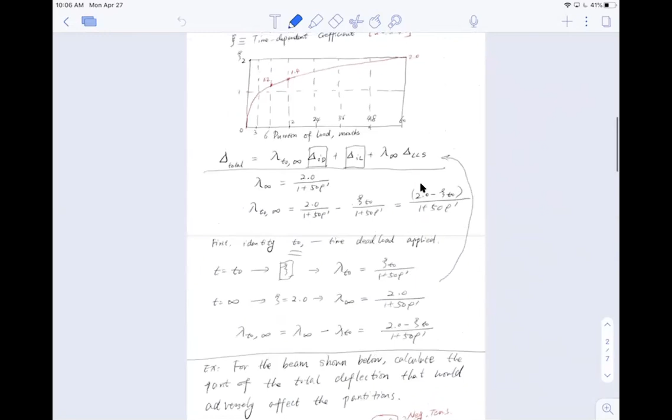Okay, so about serviceability, we have talked about the transformed sections, which means the cracked section and how to calculate the moment of inertia for that, and how we calculate moment of inertia for a beam in a continuous setting. Also we talked about how we calculate deflections, and we eased into an example showing this.

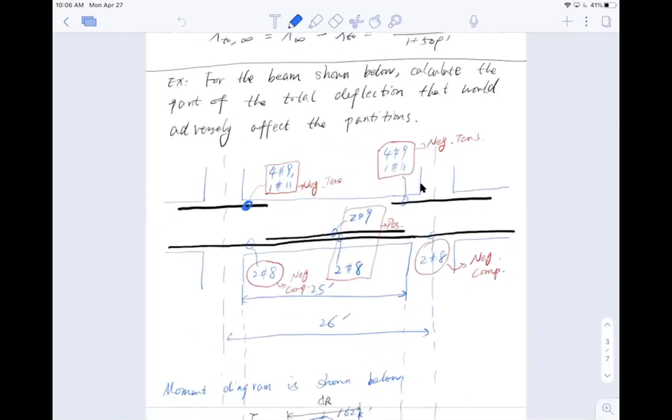This is the structure. I have reinforcement inside the beam, the column joints, and we calculate the applied moment diagram, and also the transform section. We divide them into the positive moment region, which is roughly here in the middle, and the negative region, roughly here, near the joint.

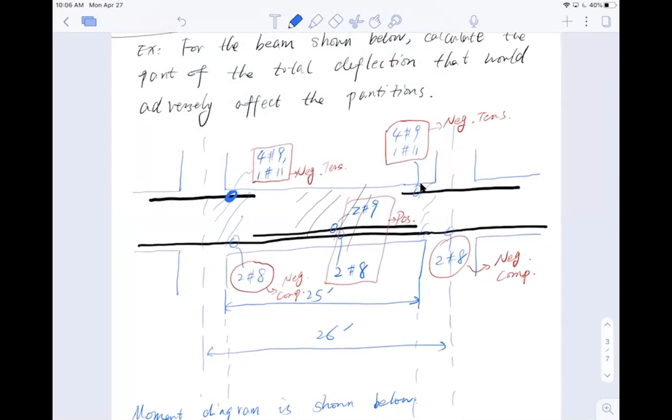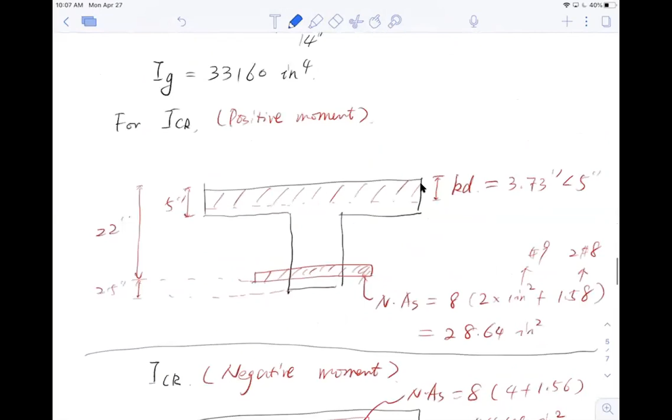The only reason we differentiate them is because they bend in different directions, so the compressive zone is on a different side. For positive moment, the compressive region is on top within the flange, and we have the converted transformed area from reinforcement at the bottom. For negative moment, the compressive region is at the bottom, and the tensile is on the flange. This is how we differentiate the positive and negative moment regions.

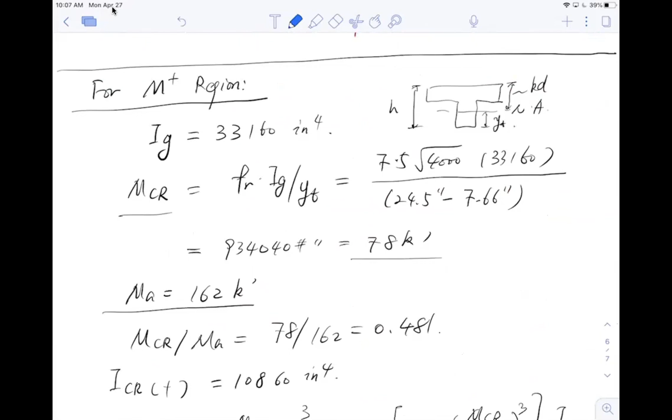You can see how we calculate the transformed section, IG, and how we calculate the effective moment in terms of the cracking moment, applied moment, and also IG, the gross moment of inertia, and the cracked moment of inertia. This is for the positive region.

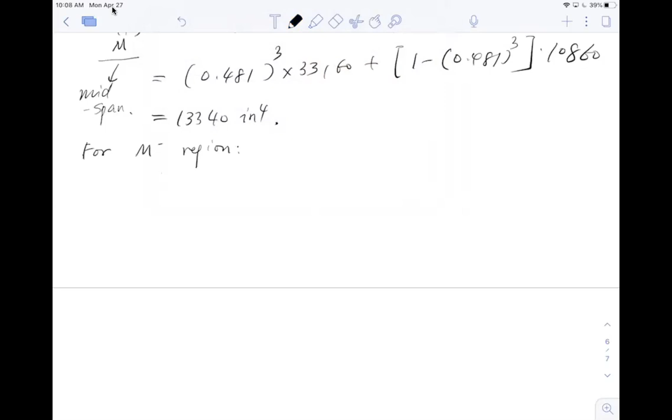So we're going to continue now for the negative region. Let me use a different color. For the negative moment region, which is the end, IG is 17200 inch to the 4th. One thing I want to point out: this number is different from the one previously calculated.

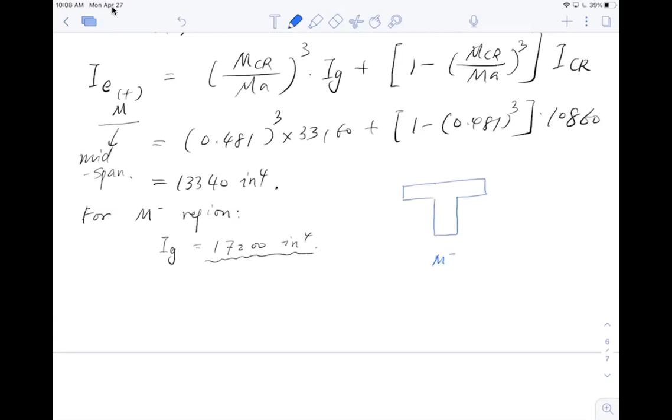What is different? For the negative region, my T-beam is going to have a shape like this. When I do positive, I use the flange, but when I do negative, I'm only using this right here.

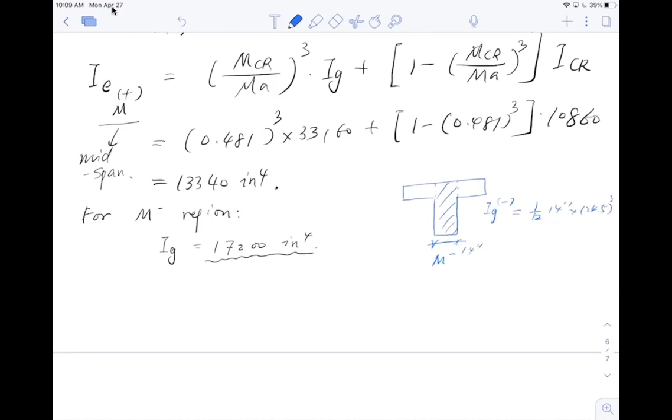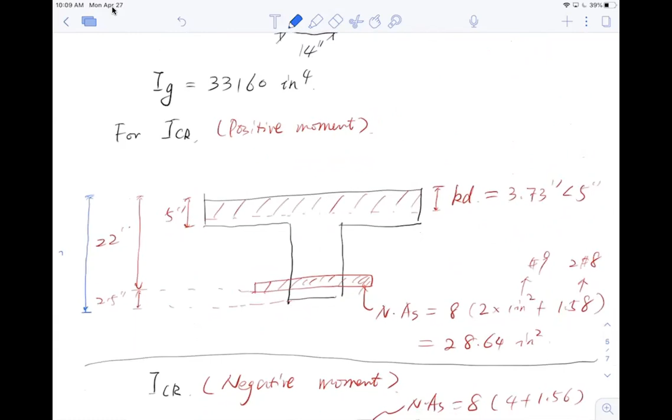So when I calculate IG for the negative region, I use 1 over 12 times 14 inches times 24.5 to the power of 3. What is 24.5 in our problem? That's the total height of the beam right here.

So now you see, if we calculate the gross moment of inertia, it's a little bit different already. The cracking moment, correspondingly, MCR, is going to be FR times IG over YT, with a negative sign to differentiate it. This is 7.5 times the square root of 4,000 psi concrete strength, times 17200 inch to the 4th, and the bottom here is 12.25 inch, which is essentially half of H, since 24.5 divided by 2 is 12.25.

So now I have my cracking moment, which converted back, first in pound-inches, is 666014 pound-inches, which is 55.5 kip-feet.

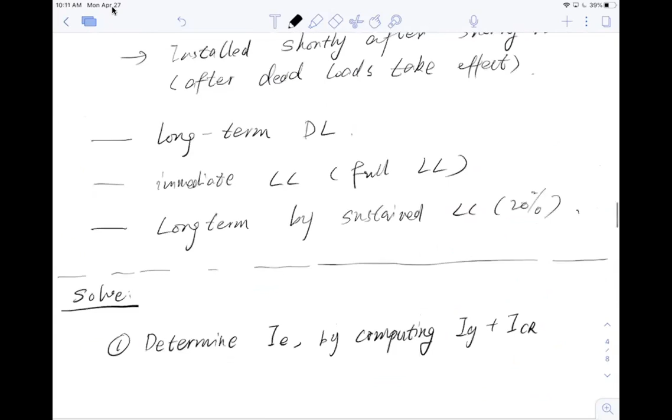Now the applying moment, using a negative sign on top — if you want to find the applying moment, you go back to the moment diagram given here, and this is the negative moment, the applied negative moment, which gives me a number of 225 kip feet.

So naturally, MCR divided by MA, negative sign, that's 55.5 divided by 225, equal to 0.247.

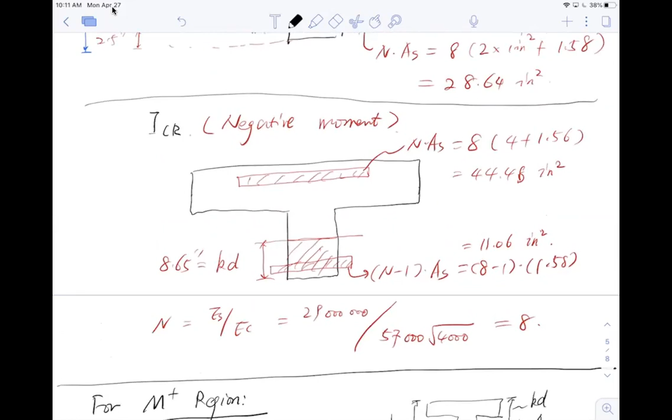So how about the cracking moment of inertia? We already calculated that from this diagram, so I'll skip the details — if you have the diagram, you can proceed to calculate it. That gives you 11366 inch to the power of 4. If you have a question how we got that number, please practice a bit following our instructions from last lecture, and if you couldn't get this number, we'll compare it tomorrow on Tuesday office hours.

So I'll illustrate that Tuesday office hours, okay? And then with that, I get my IE1, equal to 0.247 cubed. This is 17200, 1 minus 0.247 cubed, and 11366. And this gives the final number 11450 inch to the 4.

Now you wonder where that equation comes from, right? So this equation basically is MCR divided by MA to the cube, times IG, plus bracket inside 1 minus MCR over MA cubed, bracket here, times Icrack. Okay, so that's the formula.

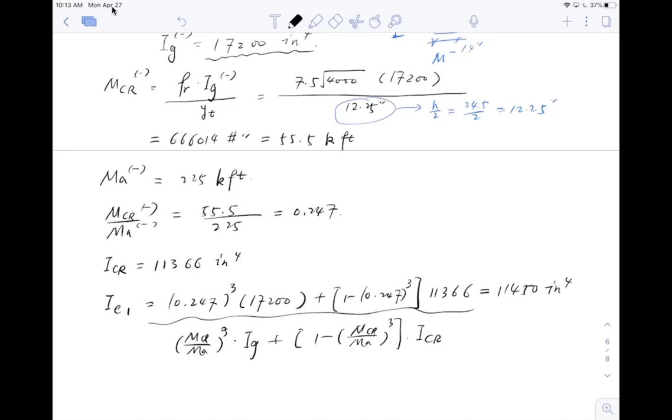All right, okay so you see here, I have one. Why is that? Because this is the column, and this is the beam. So this is IE1, and this is IE2, moment of inertia for both ends, and this is IEM, middle. This is IEM middle, okay? So we just finished IE1, but IE2, since it's symmetric, they're the same. And IEM is basically the

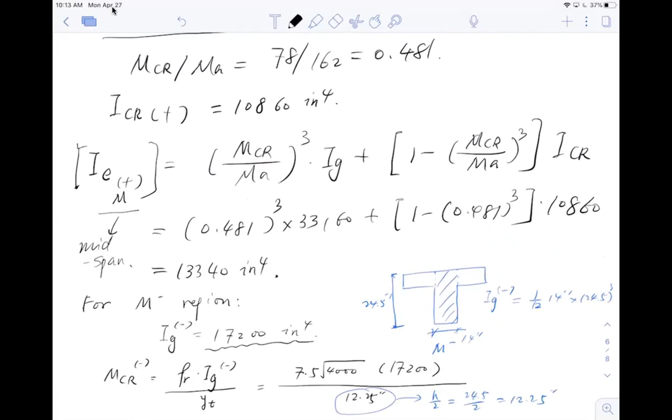positive moment, right? So this is the positive we just calculated before, last lecture, okay? So with that, I have my whole equation laid out for me. So the I effective equals half, 0.5, of IEM, which is the moment of inertia in the middle span, plus a quarter of IE1 plus IE2.

Okay, so now bring the number in, have 50%, 0.5, IE middle. What is IE middle? So go back to see this number, it's 13340, 13340 inch to the 4, plus a quarter of, now since IE1 equals IE2 in this case, symmetric, right? So this is 11450, which is this number here, multiplied by 2. Okay, so now I got the final number, 12395 inch to the power of 4.

Okay, so now that is the effective moment of inertia. That is the effective moment of inertia. Okay, so finally, I can start doing the deflection calculation.

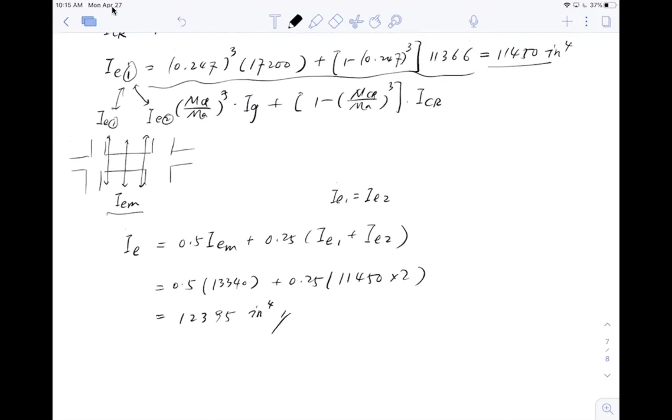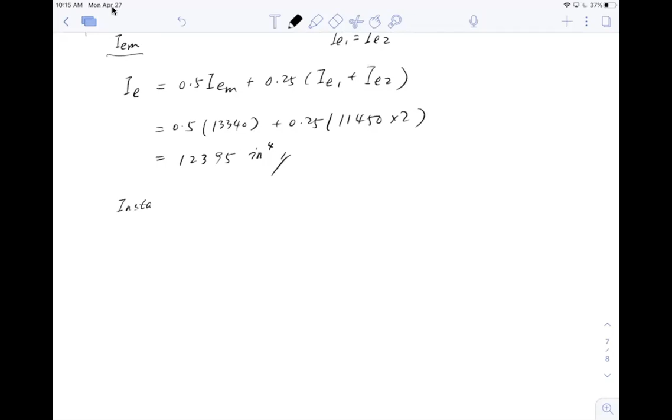So first thing first, I want to do instantaneous deflection. So what is my instantaneous deflection? That is delta I. So now I want to do delta I due to full dead load plus live load. So delta I, dead load plus live load, equals 5 over 48, L squared divided by EI.

Here, bracket inside, which is M moment, and this is middle span, mid span, plus 0.1, 10%, M1 plus M2, this is end span, left end, right end. So that is the equation used to calculate the deflection.

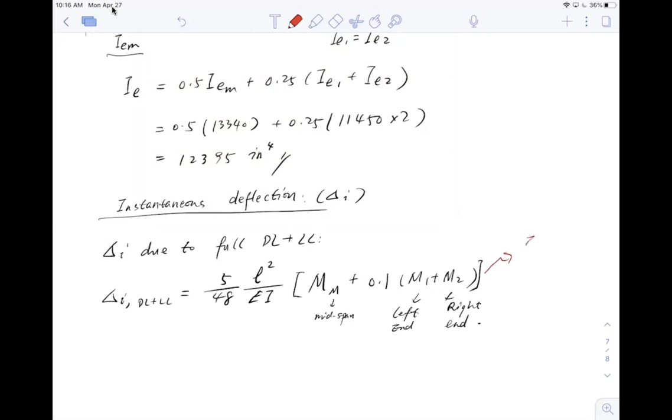Now you may wonder where that equation comes from, right? This equation you can find from equation 9-18 in the textbook. So that's the equation commonly used for calculating deflections.

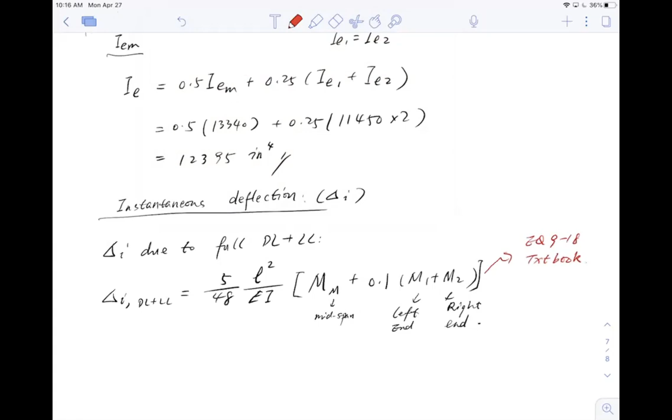All right, so now bring this number in. So I have 5 over 48. Span length is 25 feet, converted back into inches, 12 inch per foot, and square, don't forget square. And bottom here, the Young's modulus for concrete, that is 3,600 KSI.

And then EI, I got this number, this is IE, which is this number right here. So that is 12395 inch to the power 4. Okay, and then get this whole thing in, that is 162 kips feet. Where is that 162 coming from, right? You go back to the moment diagram,

Could you slow down just a little bit, please? Yeah, just a second, okay.

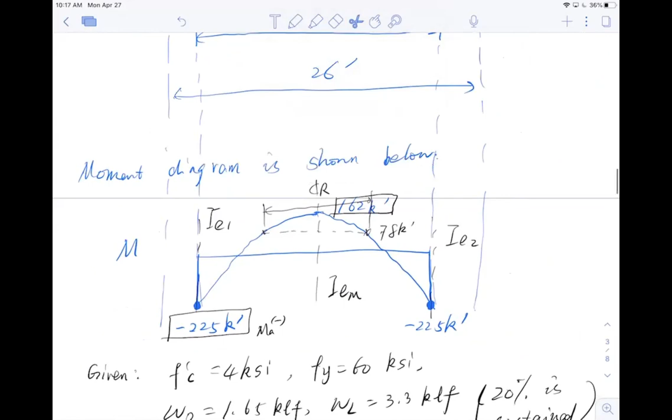So Sean, here's the moment diagram, 162 kips feet. So I'm gonna get this copied down here. Let me try to copy it. Okay, copy. All right, try to paste. Okay, so that's the moment diagram, right?

So Sean, what do you mean by slow down? You want to go back or? Oh, it's just going really fast. Okay, it's 8:15.

Okay, can you see these equations? All right, okay so let me quickly recall. So this equation for moment deflection, for calculating deflection here, this 5/48, this equation right here, this is an existing equation from the textbook, 9-18, okay? This is a standard equation. Now, we're not going to ask you to derive any equation for the exam. So if you, or homework, if you were asked to calculate deflection, you can directly use this equation.

And this is for a moment diagram like this, so it's a distributed load moment diagram. All right, so as long as I have a moment diagram like this, with end moment and middle span moment, you can directly plug in this equation to get deflection, okay? All right, so this is 0.1, and M1 is the end moment. The M1 is basically this number right here.

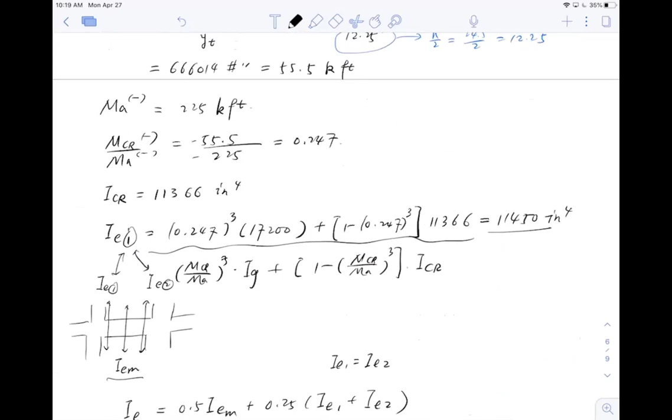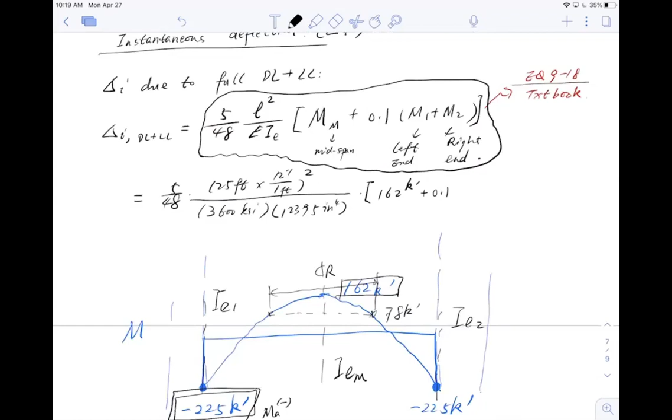The negative sign in front of it got canceled. So there's no signs in my ratio here. But if you go back to this equation right here, where I had to get moments plug into this deflection equation, there is sign, okay?

So this M1 is negative 225 kip feet, and I have another moment, which is another 225 kip feet. So make sure I have the sign considered. So this is minus 225 kip feet, okay? Don't forget, I have signs.

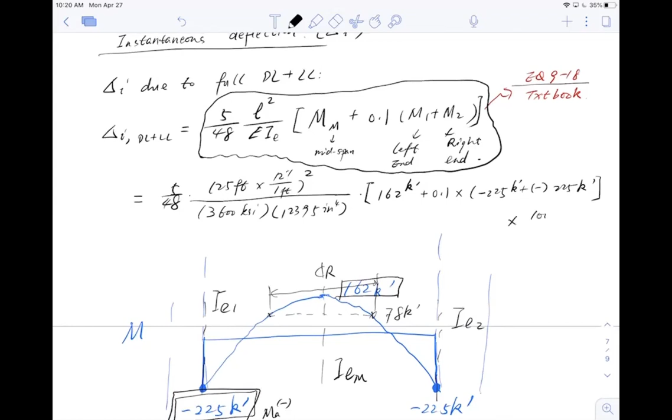Right, I have signs. Now this is in terms of kip feet. I want to convert it back to inch and pounds. So this is multiplied by 1,000, multiplied by 12.

And now I want to box this figure in. So this is not necessary, it just remind you, this is moment diagram.

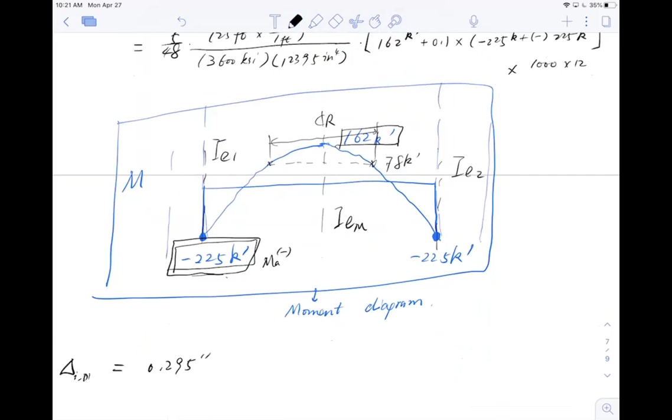So carrying on this calculation, simply just plug the number in. I got this number to be a 0.295 inch. And let me just carry this from previously. Okay, that's the deflection, instantaneous deflection. All right, this is instantaneous deflection.

Now this is dead load, DL, and live load, two components. So I'm gonna go back and see, actually the dead load, omega DL, is 1.65 kips linear foot. And the live load from previous lecture is 3.3 kips per linear foot.

So immediately I get a partition of the total deflection into the component caused by the dead load and the component caused by the live load. So now I have delta I, instantaneous deflection caused only by the dead load, equal to this delta I dead load plus LL live load, multiplied by a ratio. This ratio is omega DL divided by omega DL plus omega LL.

So this I actually have a 0.295 inch right here, and the top here 1.65, bottom here is 1.65 plus 3.3. So now I got the deflection for the dead load is 0.098 inch.

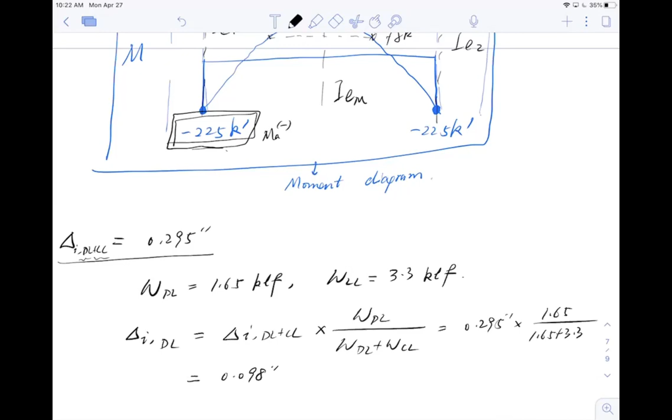Now then correspondingly the live load distribution, the deflection caused by the live load is delta I DL plus LL multiplied by omega LL divided by omega DL plus omega LL. So that is 0.295 inch multiplied by 3.3 on the top, and bottom here 1.65 plus 3.3. Okay, so I got this number to be a...

0.098 inches. Oh, not again, I'm copying it down simply. Sorry about that. So it's 0.197 inch.

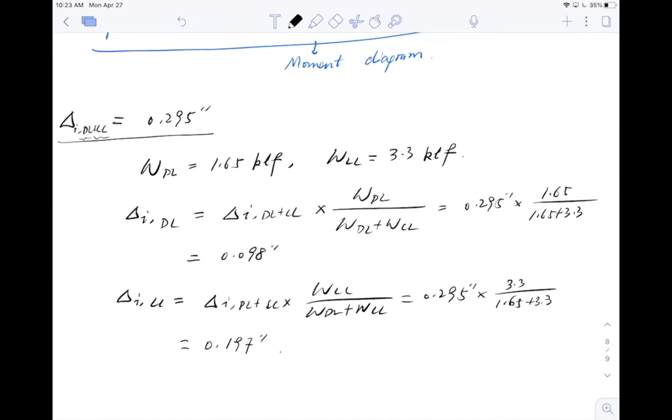Just short comments. After I get whole deflection out, I realize that my live load has much bigger deflection than dead load. So basically saying the deflection usually is controlled by the live load.

All right, good. Now let me ask you this question. If anyone cares to answer, the question is what or where exactly this deflection is at?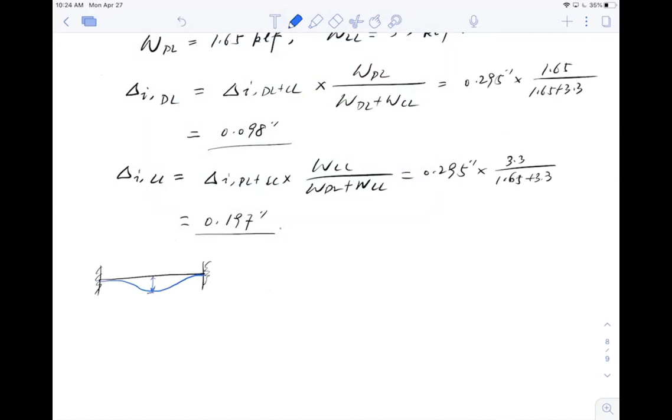So we talk about this is the beam. Say now we have almost like a fixed end. So it's gonna deflect, let me use something like that. So where is the deflection at? Right, so I want you to keep this in mind. This deflection is at middle span.

Don't forget, this deflection is at the middle span. Now you may ask, okay, so when we calculate the moment of inertia, it was not only in the middle span, we do consider the contribution from two ends. Yes, but those are boundary conditions. We do consider them when we calculate the moment inertia for the whole beam, but when we actually calculate the deflection, it is at the middle span.

Okay, all right, good. So this is instantaneous deflection. So how about long-term deflection?

So delta equal to long-term, equal to lambda delta I dead load plus delta I live load, and plus a lambda delta I live load sustained. This means sustained.

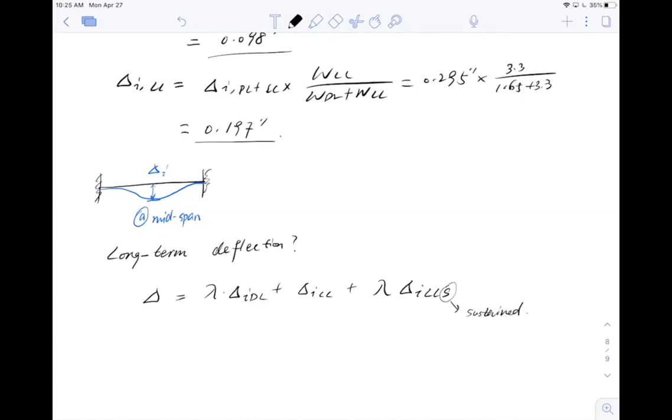Okay, and lambda is what? Lambda is a coefficient, and that is determined by xi divided by 1 plus 50 rho prime.

Okay, and now let's do some calculations. Now, first of all, this lambda here is regarding to a time, is a function of time. So when it is a function of time, basically I want to write a time here, t, and the only variable in this equation that depends on the time is this xi on the top. And we know that xi t, for life of structure, for the entire life of structure, xi t equal to what?

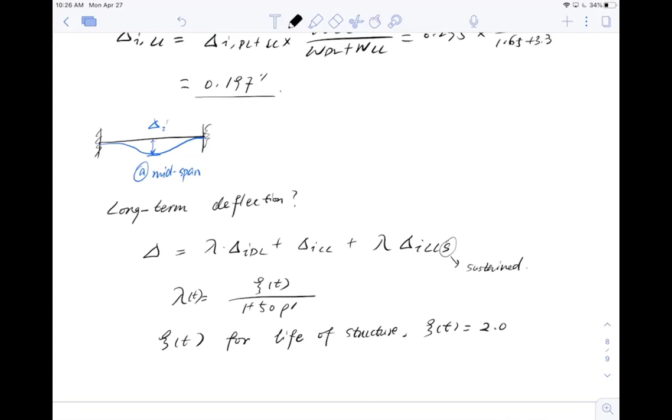Equal to 2.0, okay? Let me rewrite it better. Xi t equal to infinity forever, right? We assume our structure is gonna last forever, right? So this is equal to 2.0.

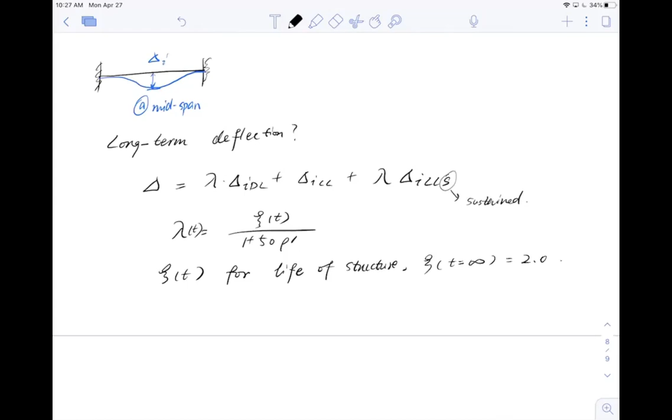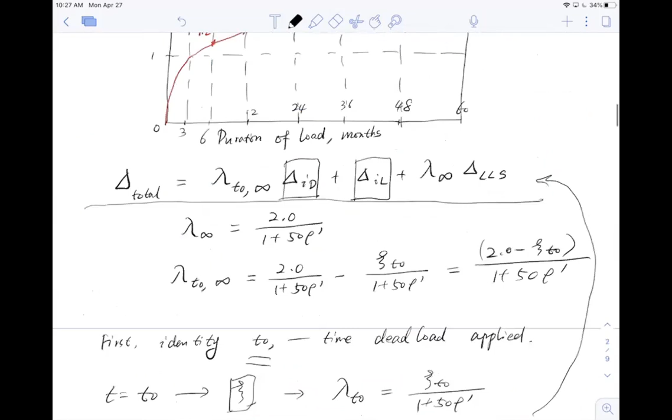Now if you're confused where that 2.0 is coming from, go back to our previous lecture notes. There was a drawing right here, and you'll notice that as my time approaches infinity, my coefficient yields at 2.0, okay? This is this equation right here.

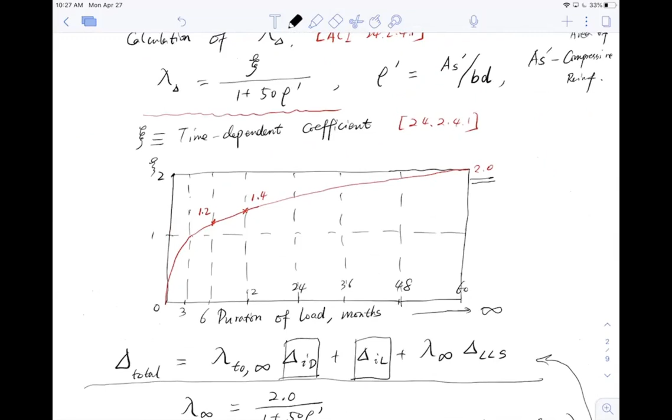Now in the exam, you don't have to remember the equation, but please prepare this figure, okay? Prepare this figure, include this in your crib sheet.

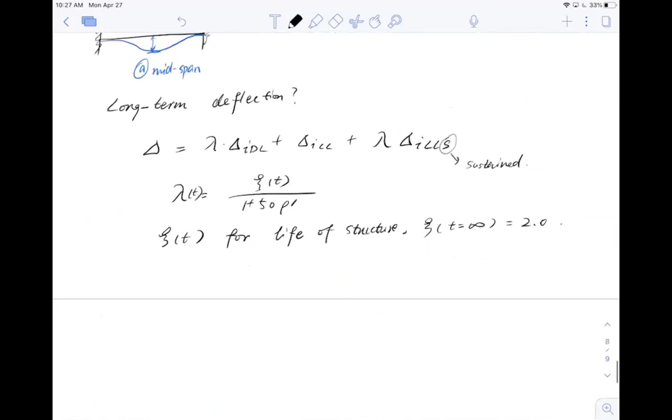All right, so now with that, I have the equation laid out and my xi on the top written as 2.0. Now the problem is, what is rho prime? Rho prime is the reinforcement ratio for the compressive reinforcement, that is AS prime divided by BD. Now AS prime equal to the area of compressive reinforcement.

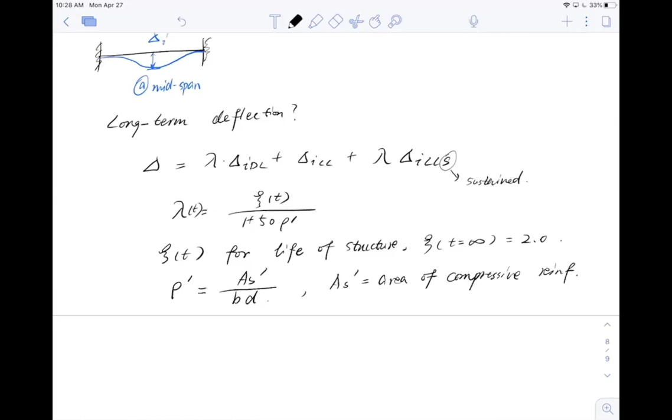Okay, so what is AS prime? Don't forget, let's scroll back to the structure drawing we have here. At middle span right here, I don't have any compressive reinforcement. AS prime equal to 0.

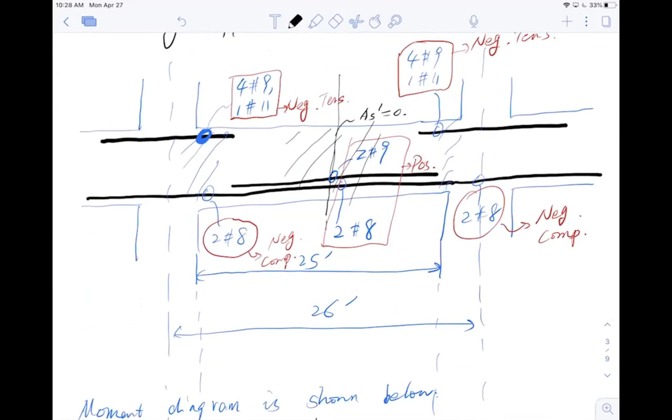So what we're gonna do here is, consider this: since at middle span there's no compressive reinforcement, therefore AS prime equal to 0. So rho prime equal to 0.

Now with all these parameters, I can now say lambda equal to 2.0 over 1 plus 50 multiplied by 0, and this gives me 2.0.

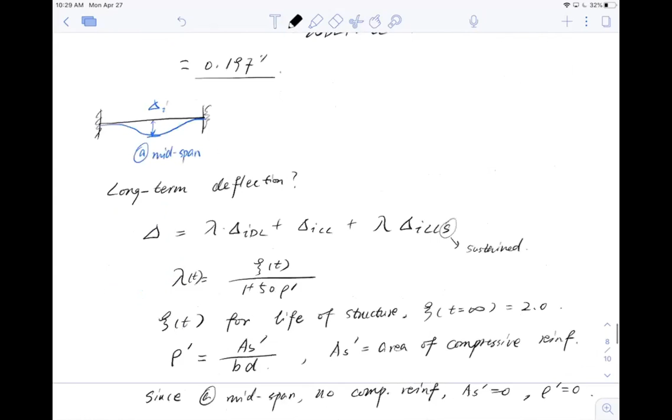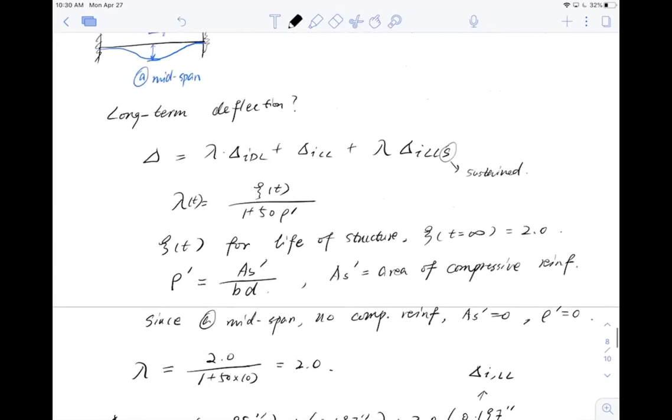So with this factor, lambda equal to 2.0 determined, I can plug back into the equation to find my long-term deflection for the partitions. That is 2.0, bracket inside: the deflection caused by the dead load is 0.098 inches, plus live load which is 0.197 inches deflection calculated previously, plus another lambda multiplied by 0.197 inches, which is the delta instantaneous live load. But the equation right here is asking for sustained.

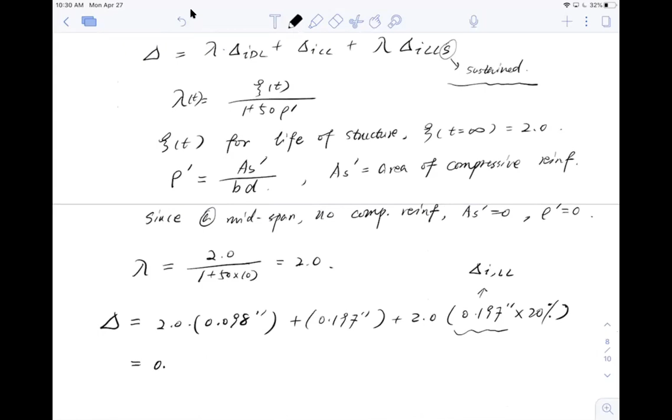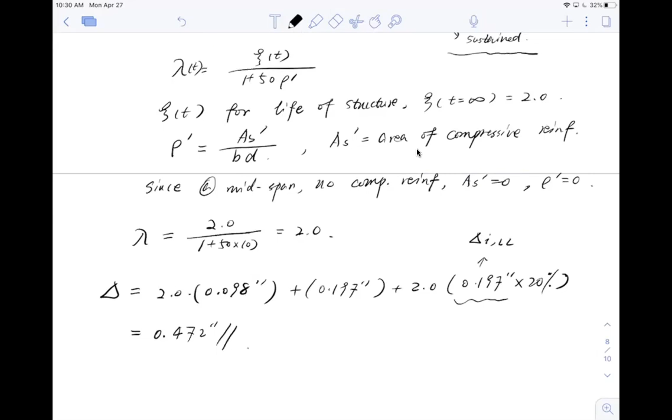Recall the problem said there are 20% of the live load sustained, so multiply by 20%. So now my final number yields at... my final number deflection yields at 0.472 inches.

All right, so now finally I got my long-term deflection. This is the long-term deflection. So now we're done with serviceability.

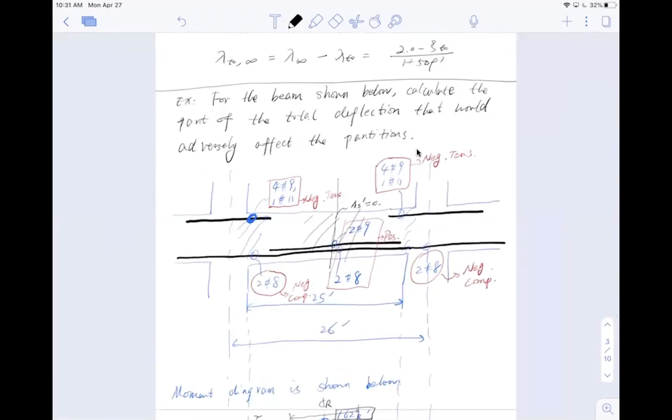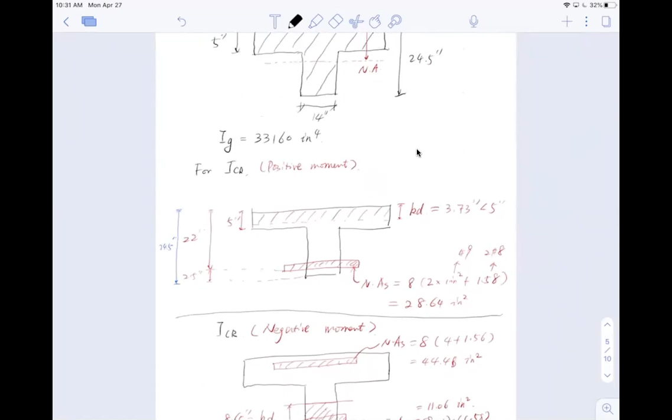So here is the long list of what we did before. Quick review for this problem at hand: we first checked out the gross moment of inertia for an uncracked section, for the uncracked section for positive moment. Since it's a T-beam, uncracked section, I'm gonna take this whole section. Then I got the ICR for positive moment, assuming the compression zone is within the flange, and convert the steel into concrete nAs, and calculate the moment of inertia this way. We also calculate ICR for negative moments, where the compressive zone is at the bottom here, and the reinforcement at the top will be the tensile reinforcement, converting to nAs.

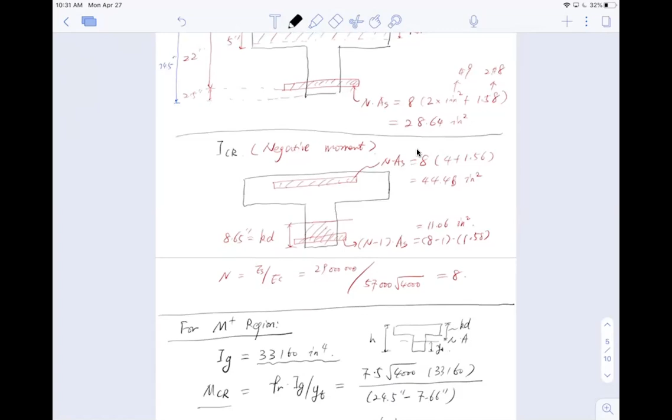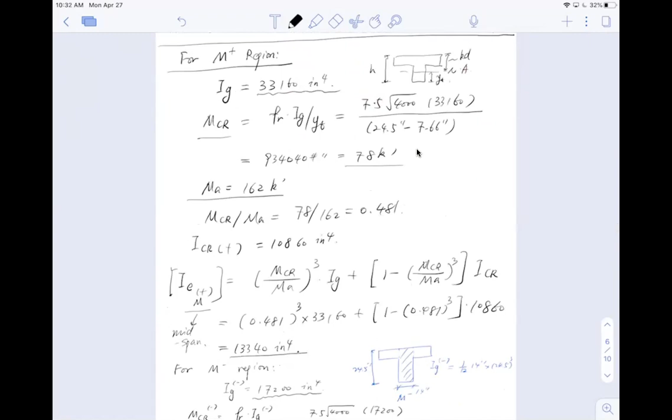And then we proceed with calculating the IE, which is the effective moment of inertia at middle span. To calculate effective moment of inertia at middle span, we need several things: we need the cracking moment, which can be calculated from MCR, which is FR, modulus of rupture, multiplied by IG divided by YT. We need applied moment from the moment diagram, and we got a ratio, and plug in to get this moment of inertia, effective moment of inertia at the middle span.

And then we calculate for the negative region. Slight difference in terms of the negative region: we have to invert our beam to calculate the compressive zone at the bottom here. Then we proceed to do the same thing to calculate the moment of inertia for the negative region. And then we got both the middle span and the two ends in terms of moment of inertia. We bring this equation, plug them in, to get effective moment of inertia.

And then we proceed to calculate the deflection. When I calculate deflection, I use the equation from the textbook, and you can continue to use this one in your exam and homework, all right.

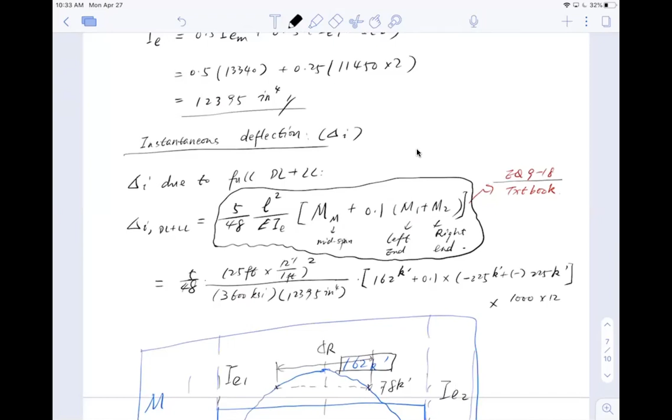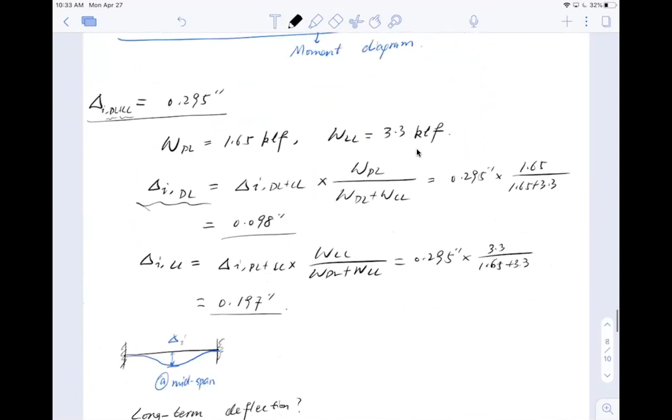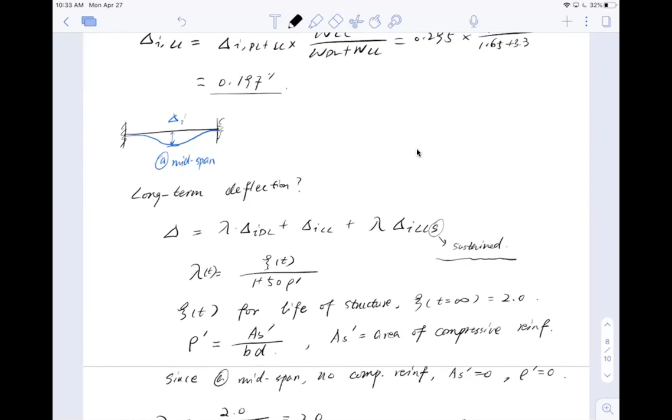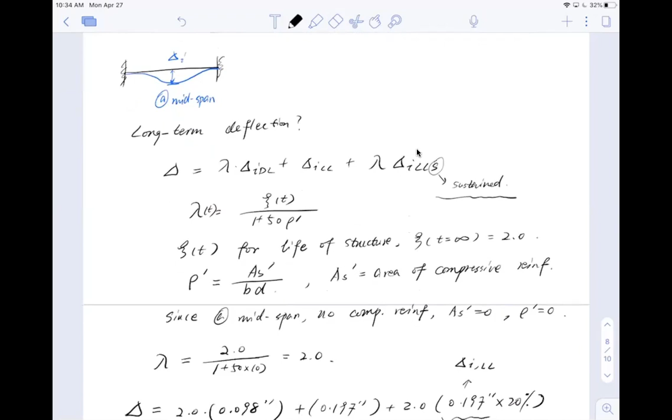Once I calculate the total deflection, I separate it into deflection caused by the dead load and deflection caused by the live load. Keep in mind, all the deflection we're talking about is at the middle span. Then I use this equation to calculate the long-term deflection, which requires a coefficient lambda that is a function of time, usually for the life design span. We assume xi at t equals infinity equal to 2.0, and rho prime is the compressive reinforcement. In our case there's no compressive reinforcement at the middle span, so rho prime is 0, but in specific cases with compressive reinforcement you must consider it. Then I bring the whole equation together to get the final long-term deflection.

Okay, so now we're done with all the serviceability calculations. I want to pause for a second and ask if there are any questions regarding this. Anything that is unclear? Any questions at all?

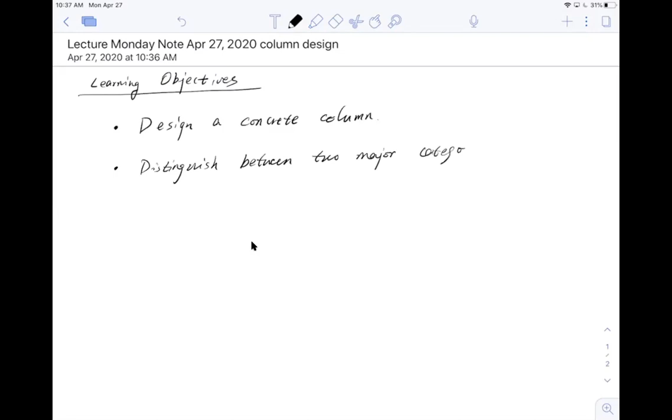The overall goal is to be able to design a concrete column. We also need to determine and distinguish, tell the difference between, two major categories of columns.

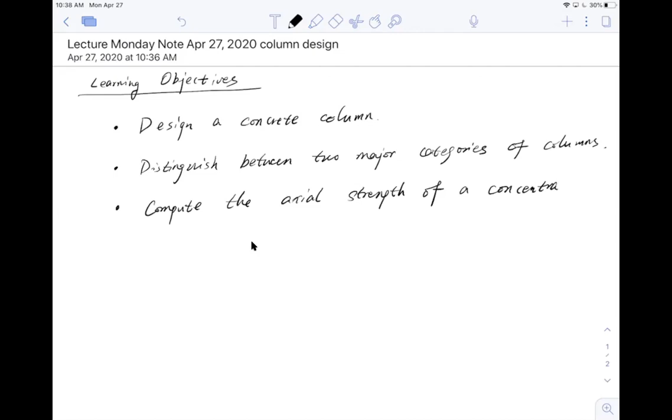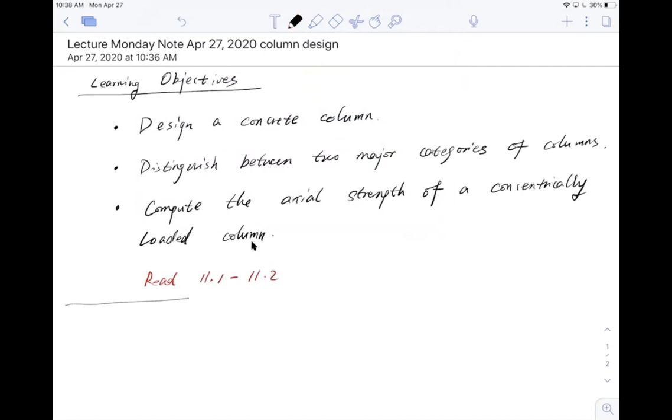And then we also need to compute the axial strength of a concentrically loaded column, which we'll talk about. You can find this in the textbook, in chapter 11, sections 11.1 and 11.2. So these are the objectives.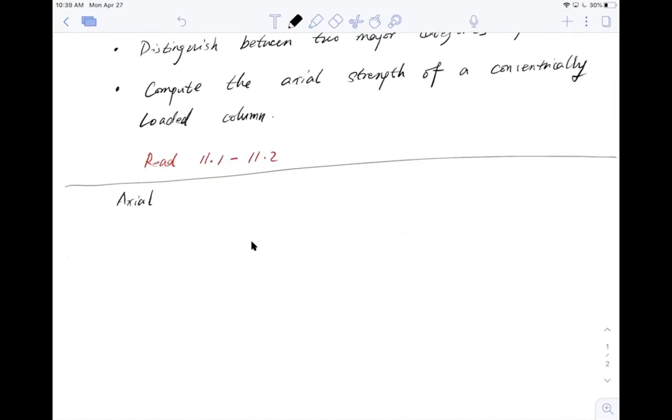So, axial compression members—let me draw this in the middle. This is the central topic for concrete design. Think about it: what are we dealing with every day in daily life? We talk about bending, which is flexure, and we talk about shear, and those are all for beams—so one-way beams or slabs. For beams and slabs you have moment to consider and shear to consider, and then finally you need a column. The column is all included in these compressive members.

Now I want you to think of this picture: I have a compressive member, so usually this is what a column would look like. I have this compression force, but sometimes I can also have eccentricity, which means I have a bending moment. So the compressive member can be divided by the type of deflection—one is called with bending, and the other without bending. All these compressive members, for example, include the arch.

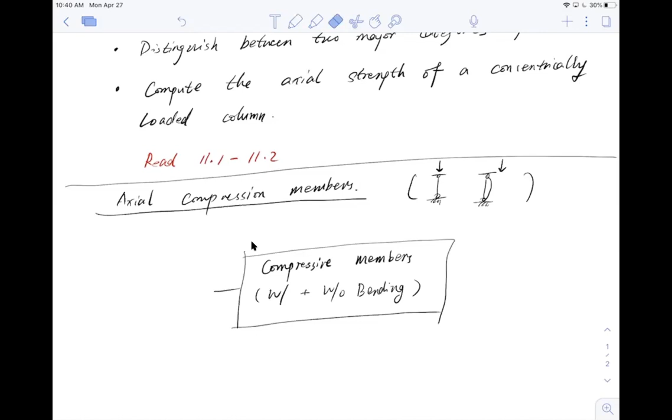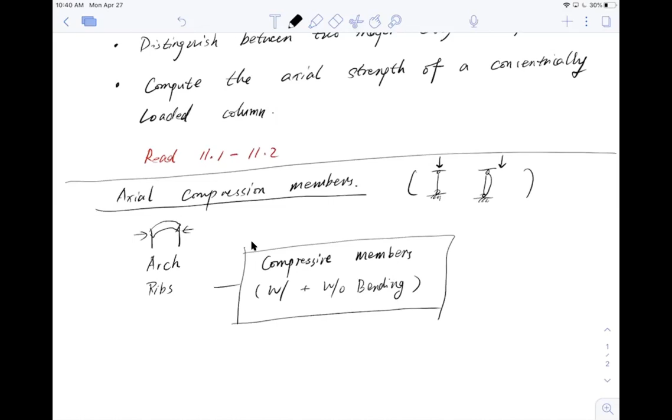Okay, I have ribs, right? So you've seen this arch before, right? For example, this is the arch and this is the doorway, and they're in compression like that, right? And I have walls - sometimes I have walls, vertical members, okay? I also have shells.

For example, if you go out to see a stadium, there's an arc on the outside, and actually they're in compression, right? They're in compression. I have truss members, which if you go out to a bridge, for example, I have typical truss members, right? And that is in compression, okay.

I also have frame members, right? And you know all about it, right? Frame, for example, like this, okay? And I have compression, and I have columns, right? That is the central topic of our lecture this week - columns, vertical members, columns, okay?

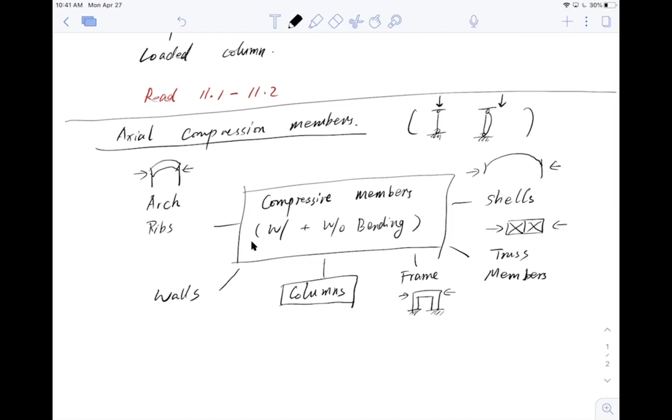All right, now for columns, I can further divide them into the following subcategories, right? I have column with longitudinal bars. I have columns with longitudinal bars plus lateral ties.

So these longitudinal bars with lateral ties - if I see a cross section, these are longitudinal bars, right? Cross sectional view. And I have ties like this. Okay, this is one type of column.

I have the other ones, longitudinal bars plus spiral. Okay, so that means if I see it, it's almost like a circular, and I have bars all around it. Okay, so that's another thing.

And then we also have a composite member with structural steel. That means I have a section like this, and I have H-beam, for example, steel inside.

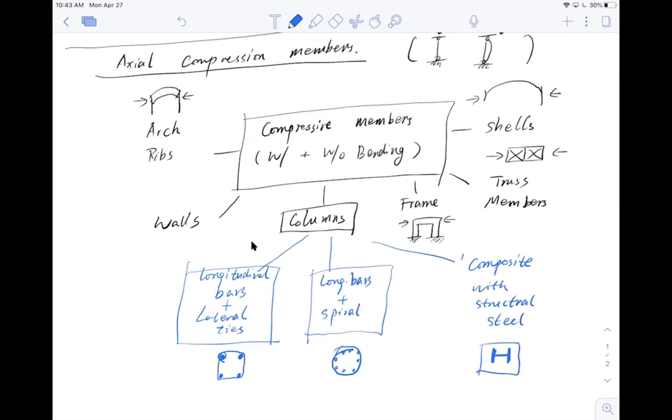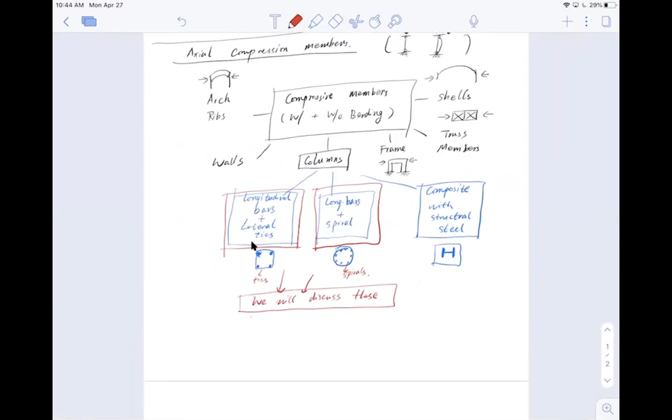Okay, inside, right? Now for our purpose, right, we're gonna talk about this, and we're gonna talk about this, okay? So we'll discuss this only - we only discuss column with ties, with square stirrups that has openings, okay, on the left, ties, okay? And we also discuss column with spirals. Okay, all right, so these are a general classification of compressive members and also columns, right? So we're focusing on the ties and spirals.

Okay, so moving on, right? Again, a finer definition of columns, right? So columns, what are those columns, right? So first of all, columns are vertical members that carry loads.

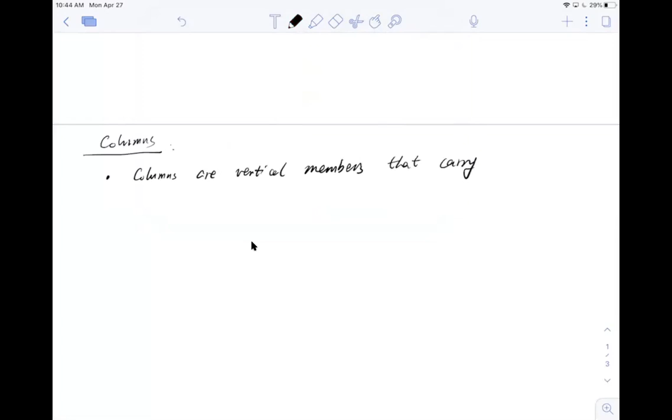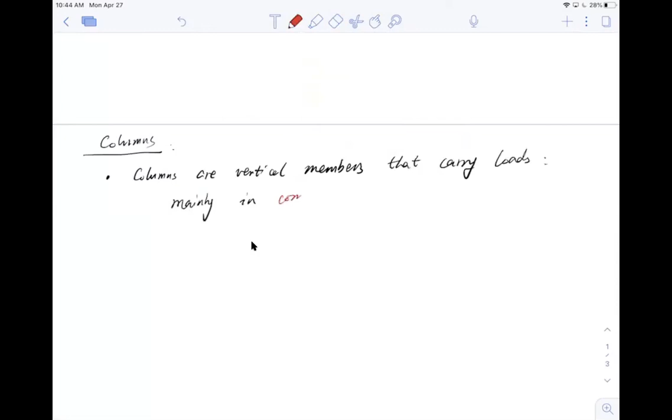Carry loads, right, vertically, right? Of course vertically, but mainly in compression - use red, highlight that. In compression. Okay, so keep in mind, columns typically bear compressive stress. Okay, but also we cannot forget there's also something else, right? Consider bending - bending might occur about one or both axes.

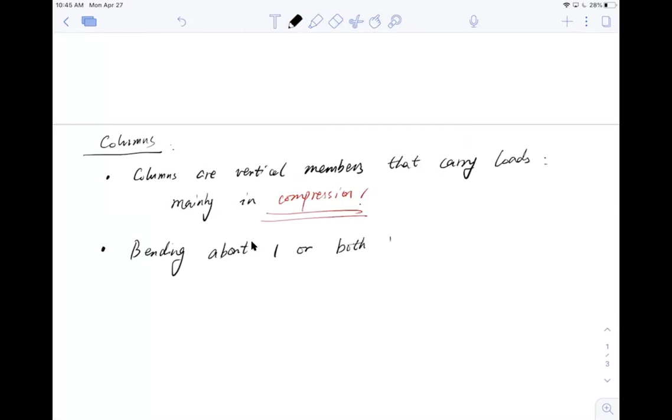Right, so simply put, if I have a column like this, right, now from basic mechanics of materials, combined loading chapter, right? So if I have an off-center load, right, I may have a moment in this way. I may also have a moment in that way. So if this is the x-axis, this is the y-axis, I can have both My and Mx. Okay, so I may have bending.

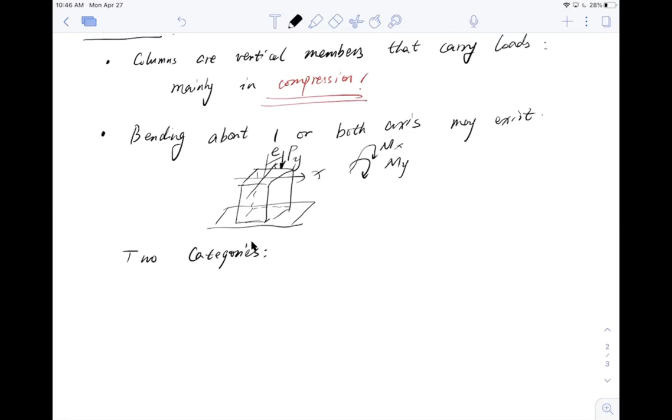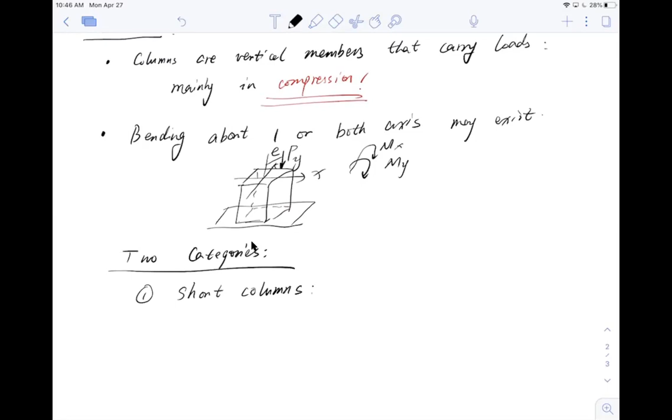All right, so depending on these conditions, right, I can further divide my columns into two categories. One is short columns, okay, short columns. So I want to say for the short column, you mainly need to consider compression, right? Only compression is considered for short columns because there's not much bending.

All right, and then there's another category called slender or long columns. Okay, now in this case, in the slender columns, right, we need to consider what? We need to consider both compression, bending, and possibly buckling, considering mainly the buckling.

Okay, all right, so I think this is a good stopping point, we're gonna stop here. All right, but now knowing that in our lecture, we're mainly gonna consider these two, the compression and the bending. So the buckling is not focused on in our lecture.